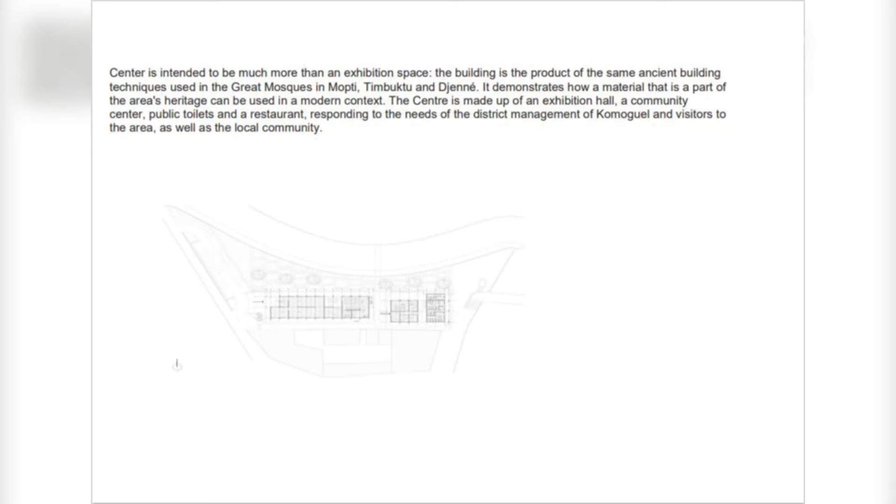The architect is Diébédo Francis Kéré. He was born April 10th, 1965 in Gando, Burkina Faso, and studied at the Technical University of Berlin.

Talking about ecology, ecosystem, and education, I wouldn't miss the chance to talk about Diébédo Francis Kéré. He was the first child in the village to be sent to school. There were no schools in Gando.

During his studies, he felt it was his duty to contribute to his family and to the community which had supported him, and to give the next generation the opportunity to follow in his footsteps. Kéré's dream is to build schools and provide education.

Now we'll talk about the matrix to compare between 10 different universities around the world with the SWOT analysis, to learn how to deal with different criteria of a sustainable campus.

The universities are King Abdullah University in Saudi Arabia, Arizona State University in the United States, Bahçeşehir University in Turkey, Hokkaido University in Japan, Izmir University in Turkey, Lefke University in Cyprus, Limkokwing University in Malaysia, the New School University Center in America, University of Pittsburgh in the United States, and Polito University in Italy.

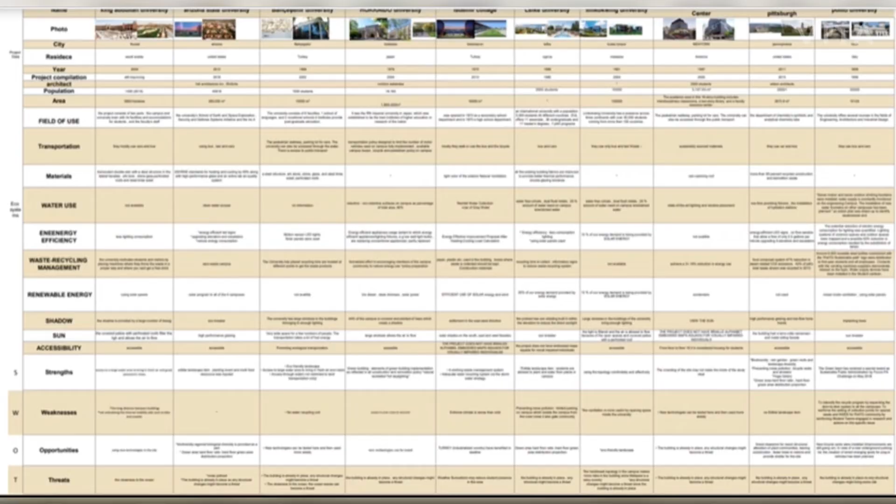In conclusion, developing a sustainability concept on an existing university campus is a matter of applying the steps over time, which requires testing and evaluating routinely. All efforts to develop an environmentally friendly campus by decreasing its environmental impact, reducing its carbon footprint, and increasing resource efficiency must be assessed to analyze if they are working and how efficient they are. The results will guide the way to sustainability while making decisions to improve the situation.

Many universities have sustainability goals to reach in the future, such as decreasing their carbon levels to 1980 levels by 2021. To reach such goals, well-organized guidelines and management plans should be applied. To support the development of sustainability, assessment documents presented for public knowledge highlight environmental consciousness in a tangible and perceptible way. A general guideline needs to be applied to support sustainability, to make assessments, research and control, see the weak points, and draw the direction for future efforts.

Moving to the urban site analysis: the geographic location. The site is bounded to the northeast by the Akkari district, to the northwest by the Yaqub Mansour district, and to the southeast by Avenue Hassan II, which separates it from Agdal. Rabat lies at 24 meters above sea level.

The climate in Rabat is warm and temperate. The rain in Rabat falls mostly in the winter, with relatively little rain in the summer.

For the topography, the site is located on slightly hilly terrain, with two gentle slopes that descend from Avenue El Houria towards Avenue Hassan II, and the other towards the sea. The natural topography of the site was a main parameter in the design of the road network. The main roads run parallel to the grade in order to avoid accentuated level differences.

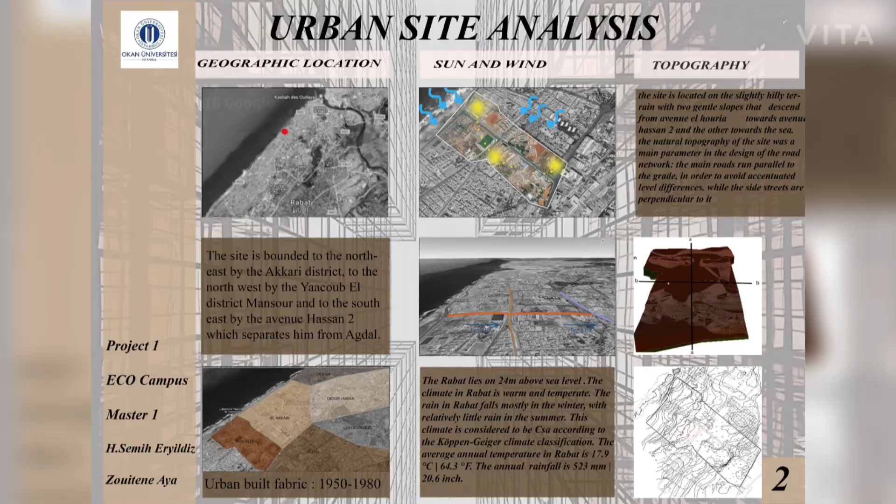We can't analyze a site without taking into consideration its historical context. The site is located in the capital of Morocco. Formerly, the city of Rabat was limited to its Medina. In 1912, it became the administrative capital of Morocco. The French then modernized the city while retaining its Moorish stamp. Yaqub al-Mansour and El Akkari are the oldest districts of Rabat and date from the colonial period.

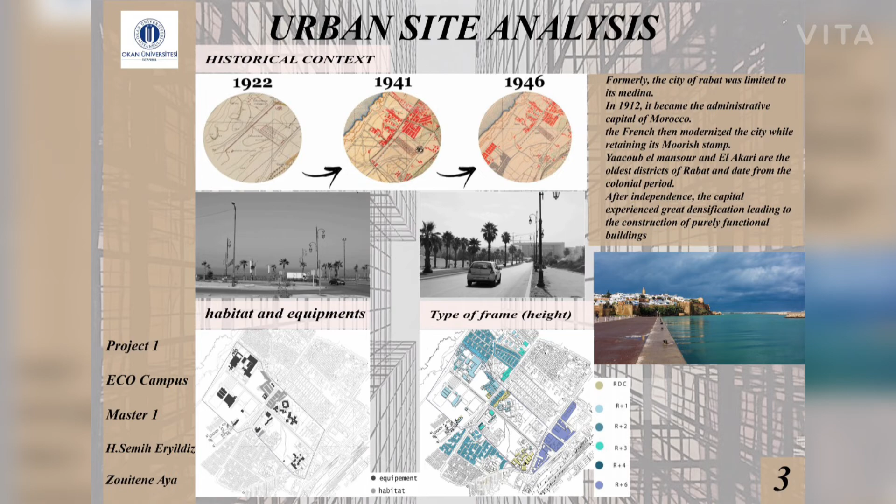After independence, the capital experienced great densification, leading to the construction of purely functional buildings. The picture below gives us a general idea about the habitat and equipment on our site, while the picture on the right shows us the type of frame and the different heights of the buildings on our site.

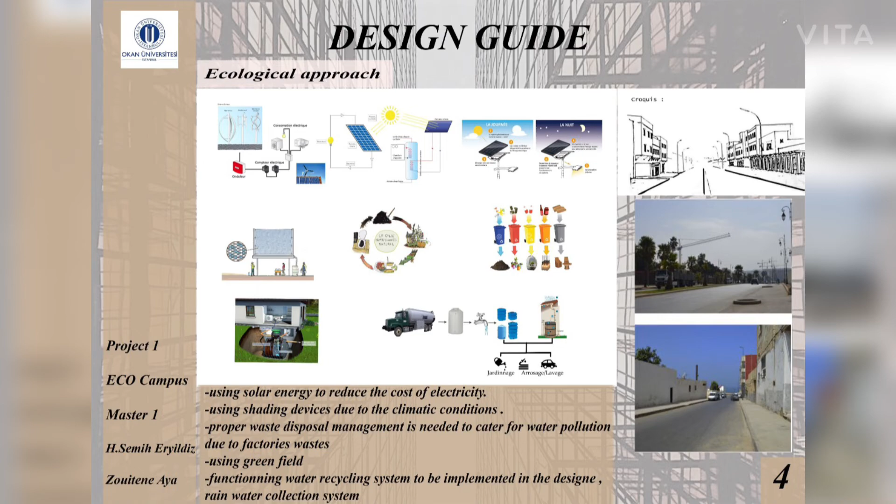My ecological approach is using solar energy to reduce the cost of electricity, using shading devices due to the climatic conditions. Proper waste disposal management is needed to cater for water pollution due to factories' waste, using a greenfield functioning water recycling system to be implemented in the design, along with a rainwater collection system.

I try to address flooring, furniture, vegetation, ecological vocation, wastewater and rainwater treatment for watering, etc., the recovery of natural resources. In fact, drinking water is not necessary for watering. The buildings have very strict requirements with consumption per square meter as low as possible. We use renewable energies, solar, etc.

Now let's talk about the concept: the plan for a space with central organization, in which the center plays a major role. It is the point of connection between all the equipment. Since it is a space for catering and administration, it seems logical that everyone on campus passes through there.

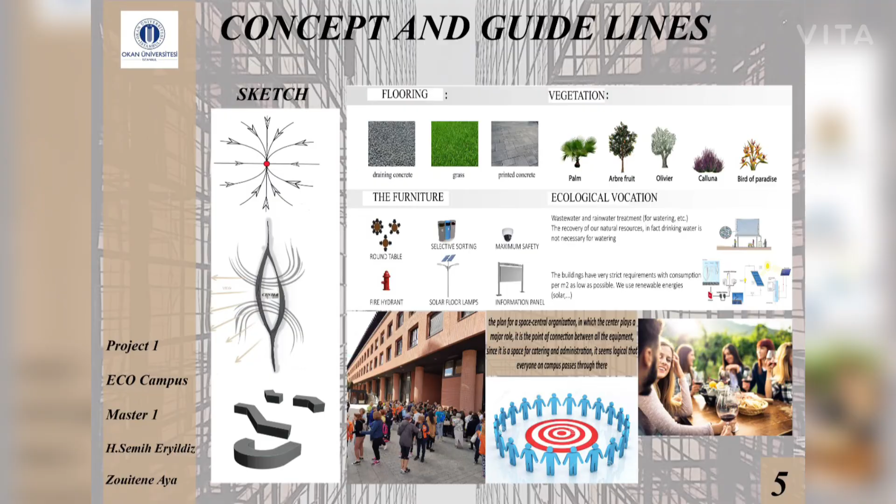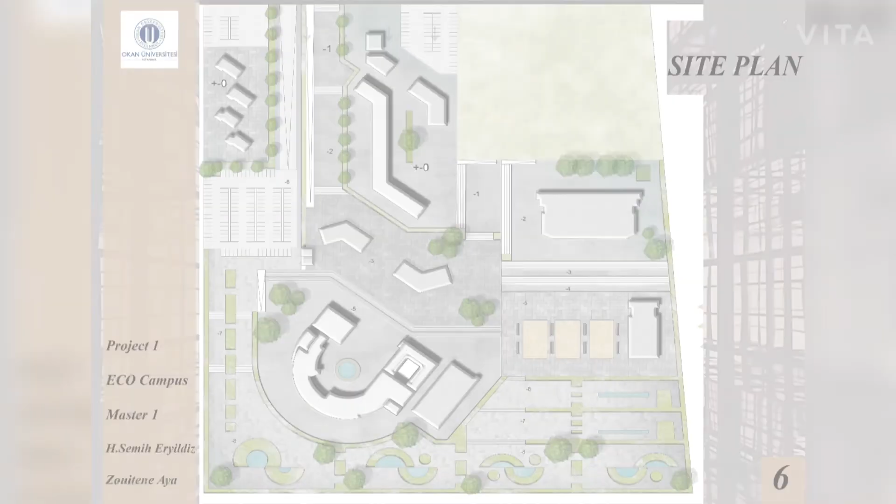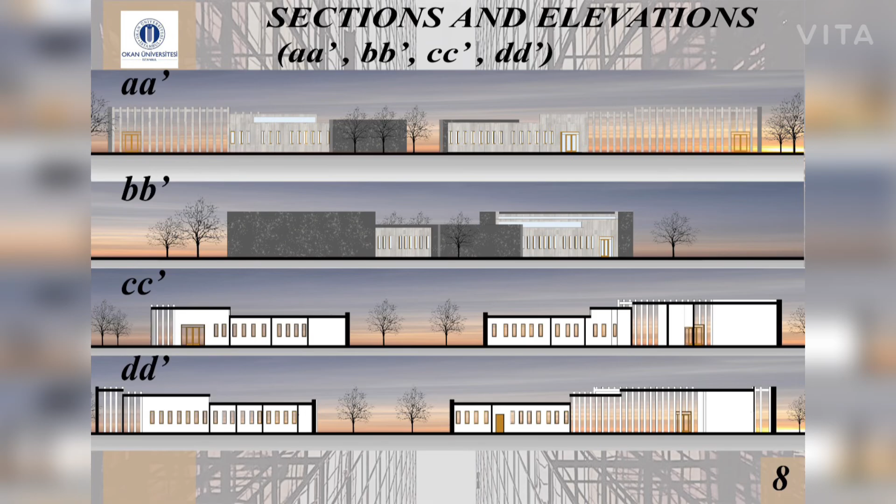The study building has a large auditorium where we can hold all our conferences and gather the students. The ground floor and the first floor are superimposed with pilings. The plan shows a large number of classrooms that can handle many students with all the facilities they might need. The staff can use these facilities as well.

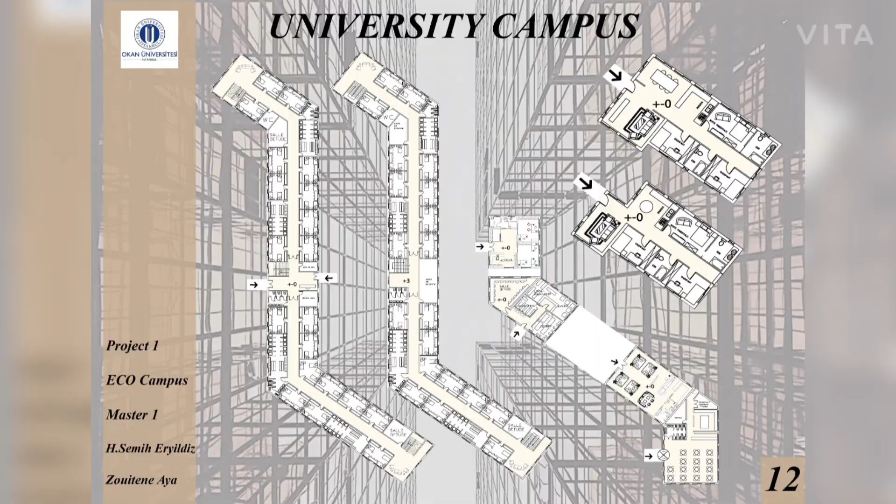The first two plans on the left present the dormitories for both boys and girls. The third plan shows us the laundry areas and some game rooms where the students can get out of the routine and enjoy their time within the university in complete safety. That's the reason why I added a multi-sport room and a covered pool.